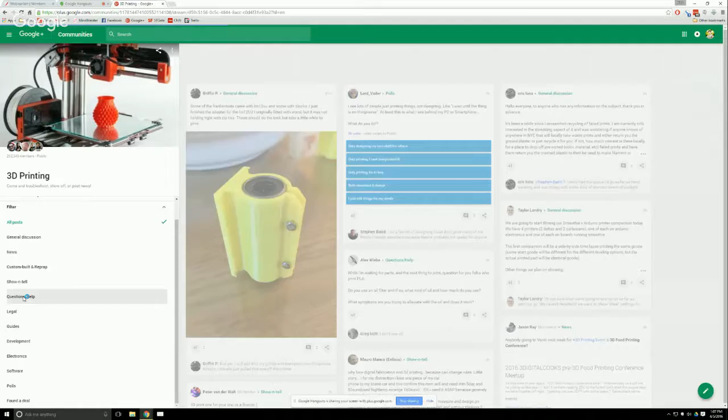There's polls and general discussion. If you look down on the left-hand side, if you're not familiar with Google Plus communities, you have all posts, general discussion, news, show and tell, and questions help. If you click on questions help, you'll go to that section, and there's a lot of people wanting to help you with various things.

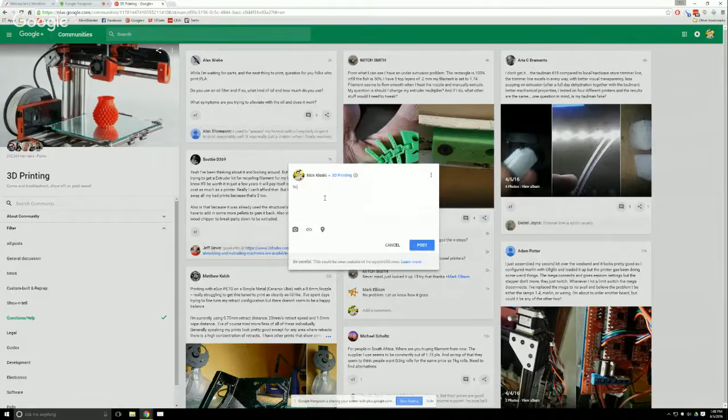For example, this guy with the little fish here says he thinks he has an under-extrusion problem. If you click on these comments down here, you see there's people helping him with his problem. So if you have a question, you can click on this little pen on the lower right, this green circle.

You can write a question like, hi, I have a question, and when you click post, it'll ask you what category you want your post to go in, so you'd say questions or show and tell, that type of thing. I'm going to discard that post. So this is a really good resource.

Again, if you just go to Google Plus and do a search up here for 3D printing, you'll see a whole bunch of things pop up, but under communities, which is the second link here, 262,000 members — there are some other 3D printing communities, but this one is the biggest. So that is by far the best way to get help that I have found.

Now there are some other ones if you're into more professional uses of 3D printing. There's the LinkedIn groups — a few communities on LinkedIn if you search for groups for 3D printing. But those are mostly for professionals asking about metal 3D printing and similar topics. You wouldn't really ask generally about your home printer there, or at least I haven't seen too many people do that, but it's a good resource.

Let me go back. We also had a person, Bill, ask a few different questions, and I'll get to those. The first question was, is there a mobile app for our new site?

So I do want to show something that we're very proud of. I will go back here and actually log out like this. We launched a new training website at honeypoint3d.com/education.

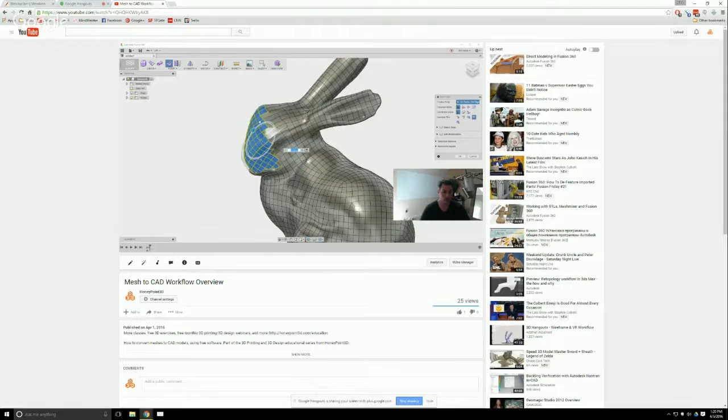This one is a mesh to CAD workflow. This shows how to go from a mesh that you start in Meshmixer, how to convert that mesh into quads, since Meshmixer is all triangles, into quads, and then how to bring those quads into Fusion 360 to make that an actual CAD model, something you can move and edit, and you can see this is a full parametric CAD model. So we have a video on that, and I know a lot of people are very interested in that.

And then also this one, which is image to 3D model. This started off with, I get this download every week from Creative Market where they give you some free things every week, so this was a pack of leaf shapes. I show how to take a picture, just a photograph, bring it into Inkscape, which is an open source alternative to Adobe Illustrator, and how to use the tools inside of Inkscape to create a vector image. So you can see that black and white image there, it was just a couple clicks, not very hard to create that vector image.

And then we bring that vector image into Fusion 360, and I clean it up a little bit, and then it turns into a profile that you can then extrude and turn into earrings or something like that. So it doesn't take actually that long to turn a photograph into a 3D model that you can 3D print.

I'm going to go over that a little bit today, but I do want to make sure to answer the question about best practices for cleaning up 123D Catch scans.

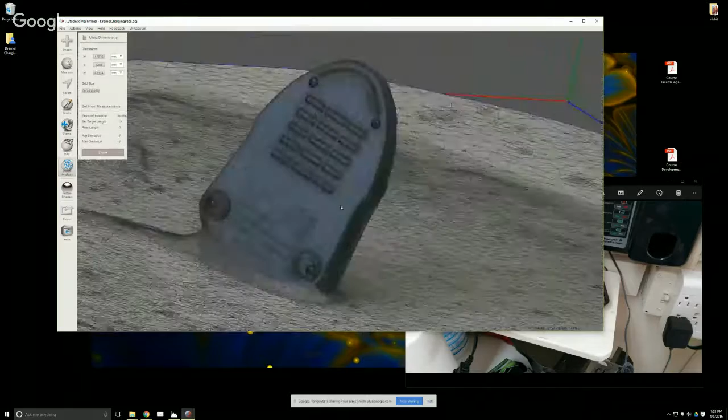But one issue with this that we had in previous versions of MeshMixer is this came in, let's look and see units. Right now this is 47,000 millimeters, so kind of too big for a Dremel charger.

And there was no good way to kind of change this. Well, now there is. So I'm going to actually do this to inches because I did this. It doesn't even matter if I keep or convert it. I could convert it - 1,800 inches. But if we look down here, it says selected measure left drag, so you see set target length.

If you look in here, you can now actually click on something and hold down the control key on your PC or command key on your Mac, and you are dragging this line. And I did a measurement. I'm going to let go of that and say set target length right here as 3.5 inches. So I said that this is 3.5 inches right here.

And if we look in - actually this is kind of a, this should say - I think it's kind of converting into millimeters and inches improperly. So let's try that again.

So from here to here is 3.5. I'm actually doing some weird conversions right here. It worked earlier when I tried this because I did it properly. But, so let's kind of do this in another way.

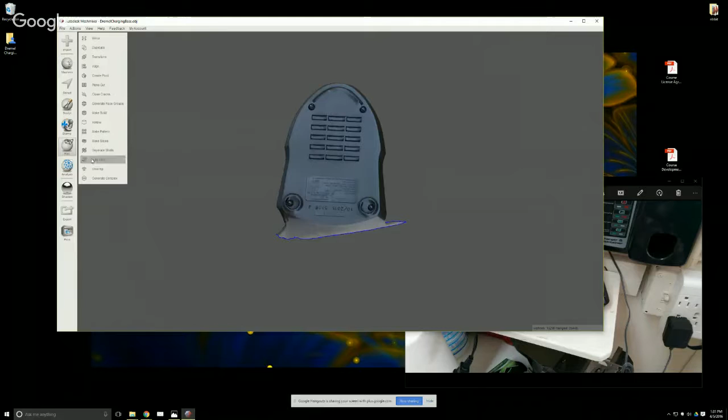So still non-manifold, but I can fix that by going to Edit, to Plane Cut, and you sometimes have to exit out and say I kind of want to plan the cut right around this bottom right here. So I'm going to go to Plane Cut, going to drag right around the bottom here. I'm going to look underneath to kind of see what it looks like when I'm done. Okay, I'm going to say accept.

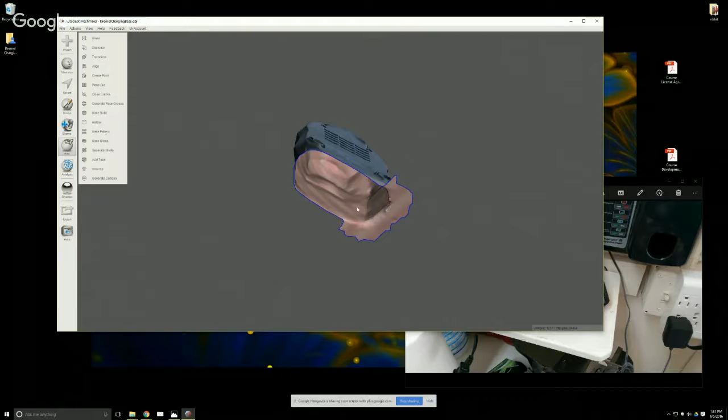And you see also that it's remaining hollow right here when you click accept because I didn't cut all the way through, so MeshMixer is not going to create a boundary right there because that wouldn't work. If I go to Plane Cut again and make a cut right here, you can see that now the green is filled in because I'm just missing this little edge here, and I can click say accept. So that's pretty good. I've cut off a little bit of the roundedness of the bottom, but it's good enough for what I'm doing right now to show you all.

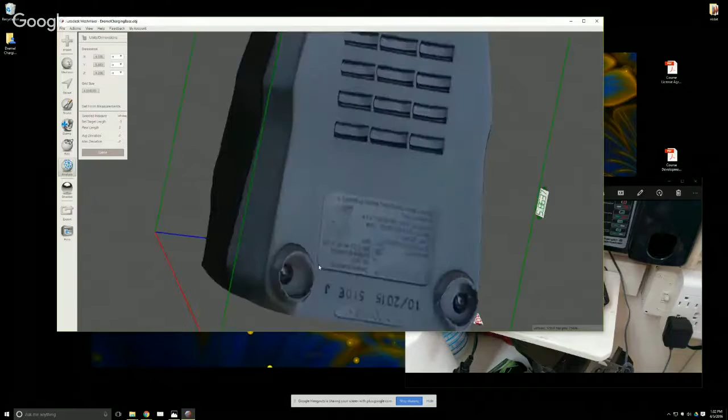So let's try to actually go into units and dimensions right now and see if I can left drag on this and try to set it. Yeah, so this actually looks as if it is properly sized right now.

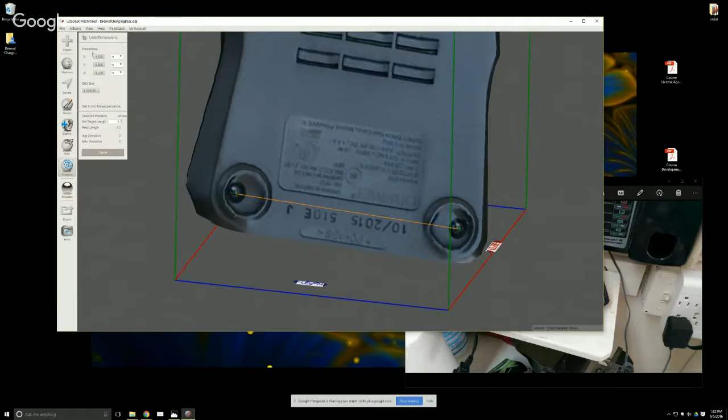Oh okay, no, actually I figured out what was going wrong. So this up here, the dimensions, we're showing the overall dimensions of the entire scan, right? I don't know really what I was thinking. It was showing a high number of things because it went out here, but it actually changed to the proper size.

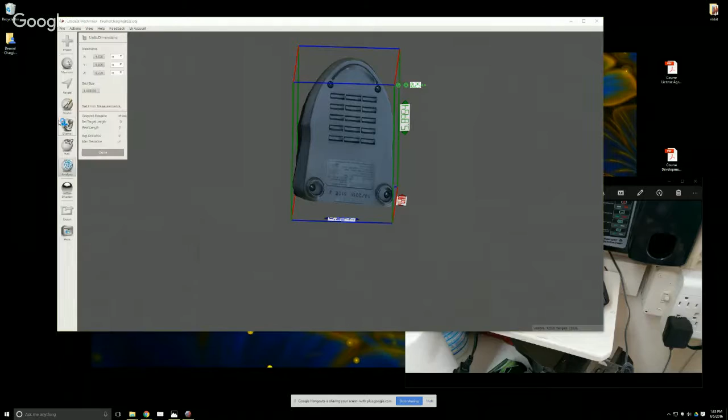So now, because this is actually important enough to actually show you again, since this is brand new with MeshMixer 3.0, let me import this just to show you.

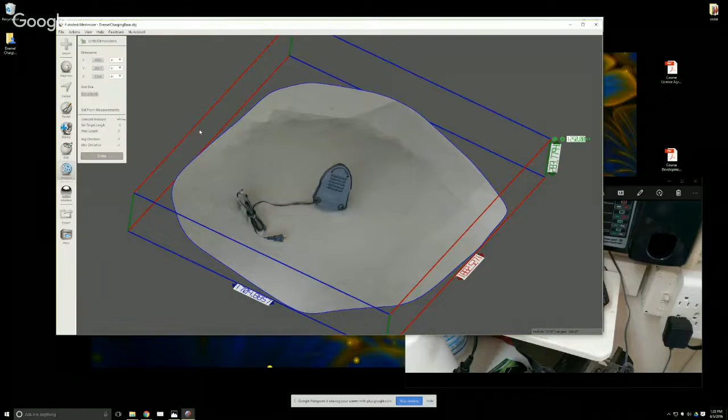Yeah, so that was the mistake I made. I went into analysis to units and changed this to inches. I could even convert it - 1882 inches, that really doesn't do it. So what I want to do, which I didn't show you before, is hold down Control on PC or Command on Mac, then click and drag and set this to be 3.5 inches. That's actually fine.

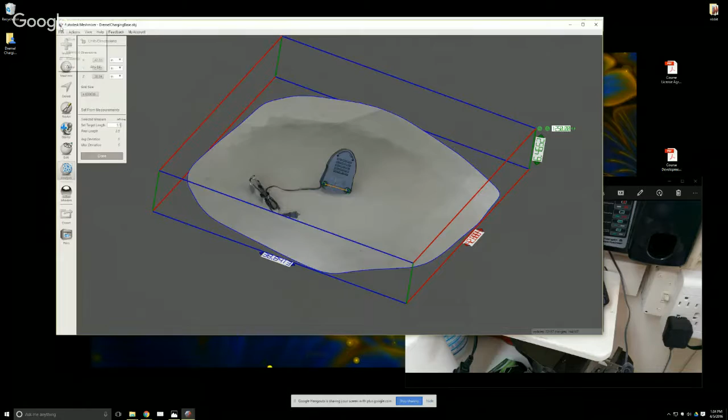It's now resized. These XYZ dimensions are for the entire scene, all of this floor space. But I just set it based on this here. So that's kind of what I forgot about before. So this is now properly sized.

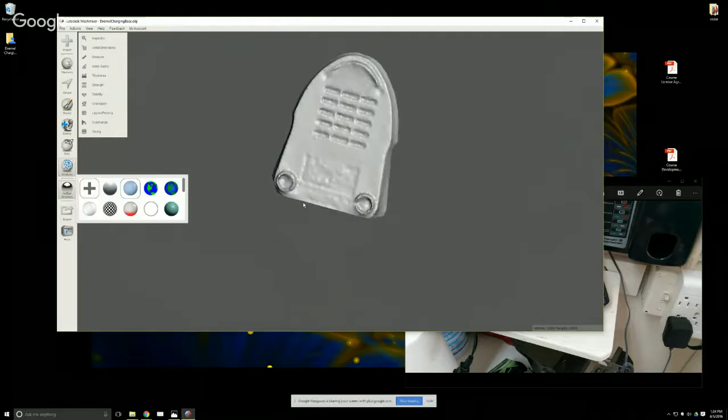For making a bracket, the easy way is I can press W. I have a good amount of geometry here, so this will actually work. Press W again. I'm going to go to shaders and just drag this shader in to get rid of the texture because we don't need that right now.

So the very easy way of doing this is to click on select, make my brush a little bit smaller, and I'm just going to paint my bracket. I know that this side is going to be facing outwards because that's where the battery goes. So maybe I'll make it kind of a cute little bracket to hold it in the front.

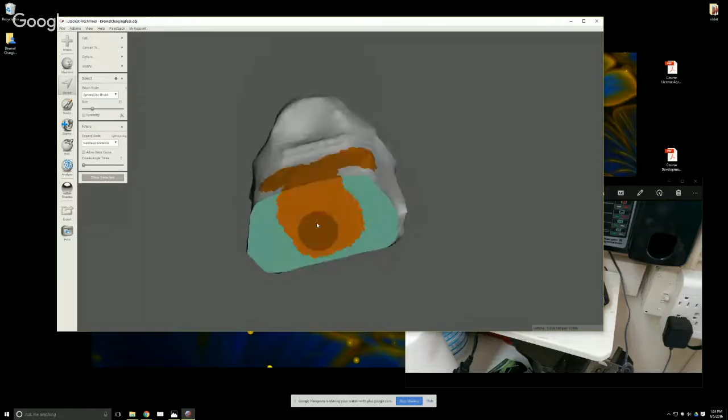I'm going to paint on where it goes in the back. I don't want it to block all of these vents in the back, so I can have it come up, and if I wanted to, I could have it come out a little bit like this. So it looks kind of nice.

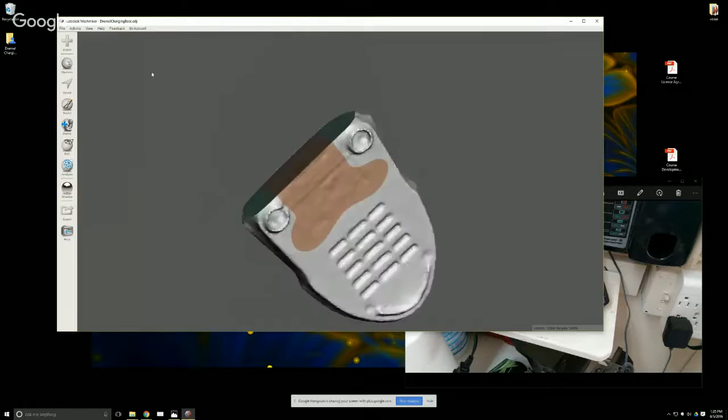And then remember, if we want to make the edges nice, we can press B for smooth boundary and say accept. Now if we say clear selection, we will see that we have a face group set - this is just a region on here that we can manipulate. If we click on select again and double click on this face group, it selects it.

And we can go here to Y to separate. So what that did is it created a separate object. We have two objects down here - one is the base and one is the selection. I'm going to open this up a little bit, turn off the eye on the base because we don't really need the base right now.

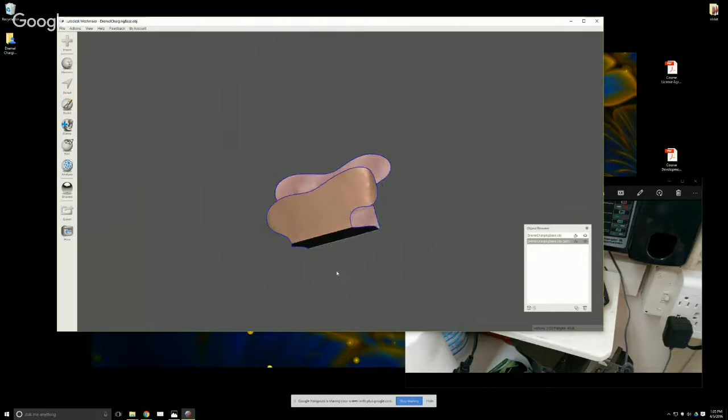And here is our mount. It will kind of turn the corner right here. I don't know if I really want that, so I can go in and kind of edit this down a little bit.

Delete that. And again, I can double click on this blue line and press B to smooth the boundary again if I wanted to, and press different deletes to do whatever I need to do. But we have this, and we can actually just say select Control A, or Command A, to select the entire thing, and then go to extrude.

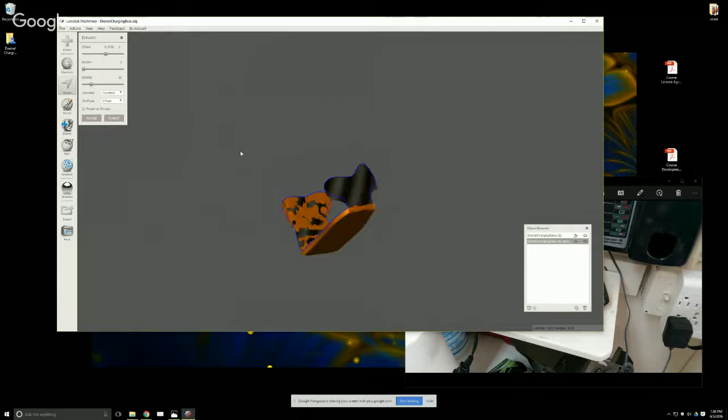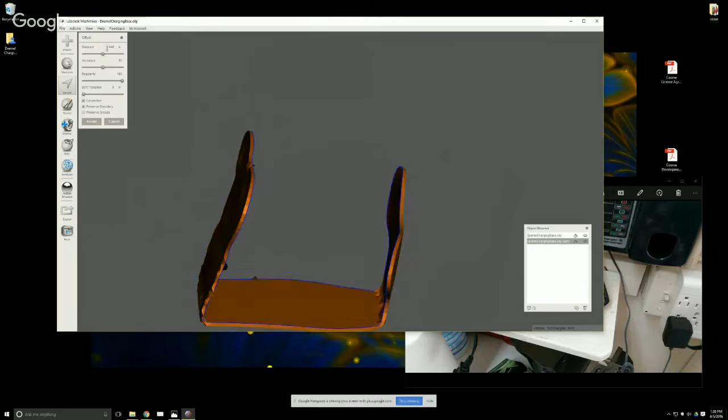Or actually, we can say constant or off of the normals - we would maybe want to do it to normals. Extrude sometimes works or sometimes gives you some crunchiness, or you can also go to offset. And offset kind of creates two planes unless you click connected, then offset connected. You could see that offsetting in a negative way goes inwards, and we don't want that because now we're going into the model.

So actually I do want to do a negative. So negative, let's say - oh, I'm in inches right now - 0.1 inches. And it kind of goes out like that. And you click accept.

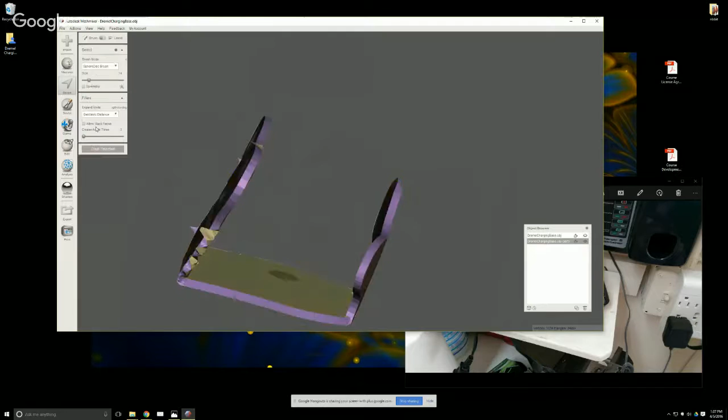Now we have some crunchiness here, some issues with the mesh, and you can do other things to clean this up, like do the edit to make solid. That'll a lot of times go out and smooth things, make this accurate. Let's see how it does here. Yeah, a little bit more accurate. You can say accept.

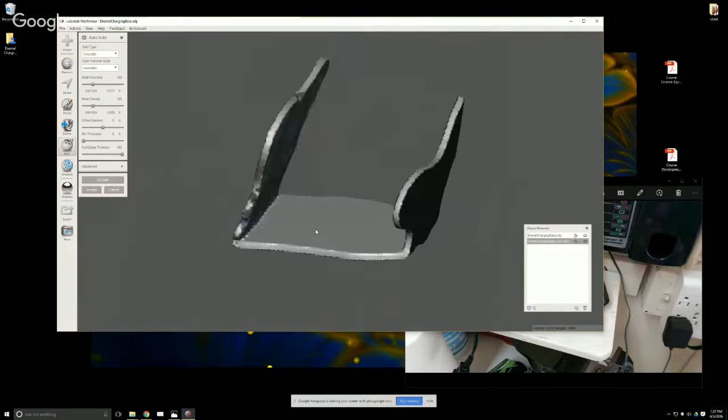So at least everything is manifold now. If you have some areas that you want to do some smoothing in, you can select those, go to deform to smooth, and smooth them out. But generally we have right now a base, and we can cut holes through these or do things like mesh mix in a cylinder.

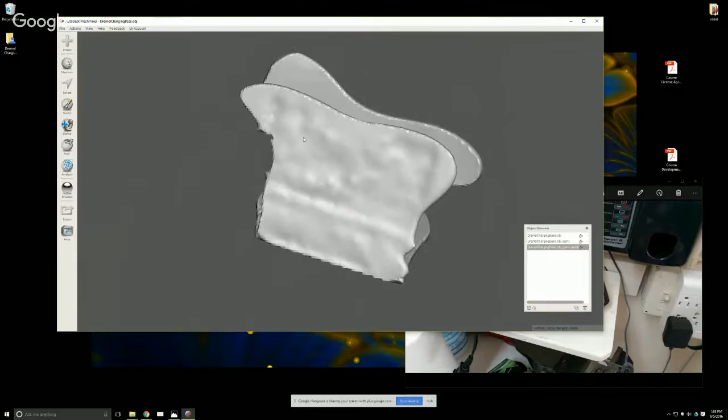And if the cylinder is of a specific size for your holes and for your screws, you can do that, and then kind of Boolean them out - so this and this, Boolean difference. So screw holes that go in. So that is one way to do it.

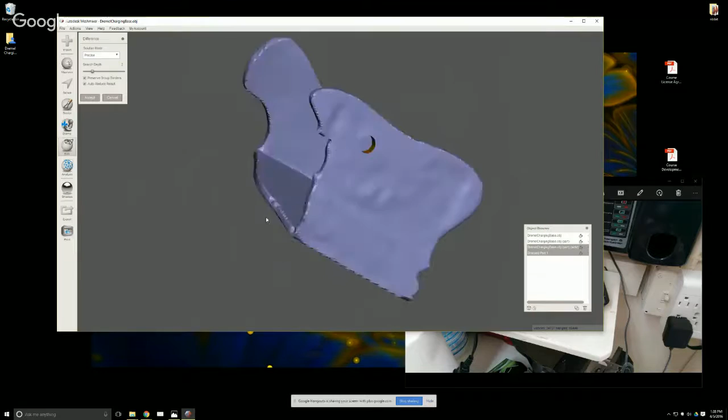If anybody has any questions, I would be happy to show you that. But that is one way of creating a mesh bracket using Meshmixer. This is pretty much guaranteed to fit, and you would just screw one part into your wall, and assuming this was strong enough to hold it, you could support that charger on there.

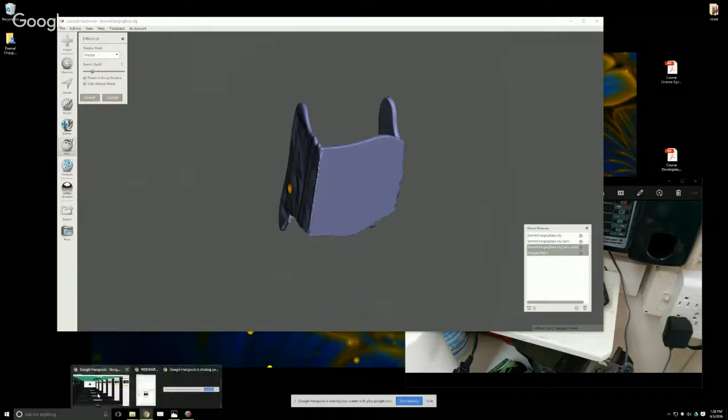The other way to do this is, let me go back here and show you for a second. This is the method I show in the video, and it's really powerful. As I said, I'm going to create a Fusion 360 class, but what I go over in the video online is a really powerful technique, and pretty much no piece of software does what I'm going to show you except for Fusion 360.

This is a reverse engineering workflow where if you start with a scan, you can create things that you could put into production worldwide with a CAD program. Let me start up Fusion 360 in the background. This is actually not that hard to do. It requires three different pieces of software: Meshmixer, something called Instant Meshes, and Fusion.

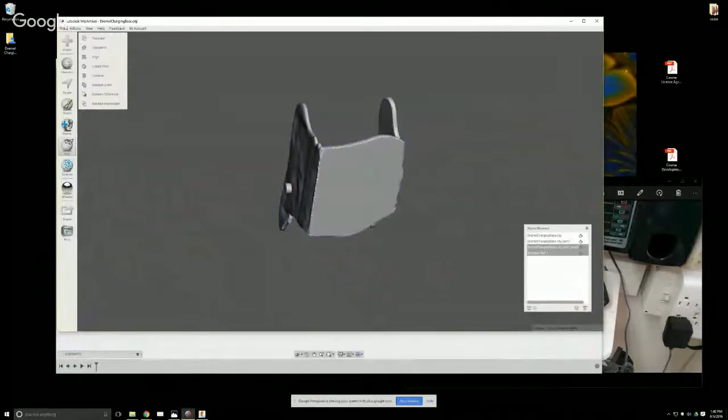So I will show you what that looks like pretty quickly. Let me go back here. Cancel that, and I'm going to just go back and replace. I'm going to bring in the charging base again, and go through this a little bit more quickly. So I'm going to plane cut, you know, kind of what I think the base should be, like this.

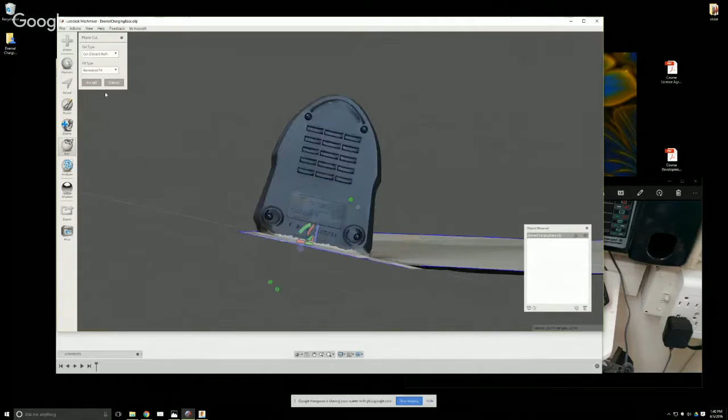Plane cut it a little bit more like that. Say accept. And you see this quite a lot - this is not connected to this. So I can just select a little bit on here and say modify, expand to connected, and then delete. And this is a base.

So the trick here is to export this as base, but in OBJ format. So I'm going to say base OBJ. There we go, it is exported.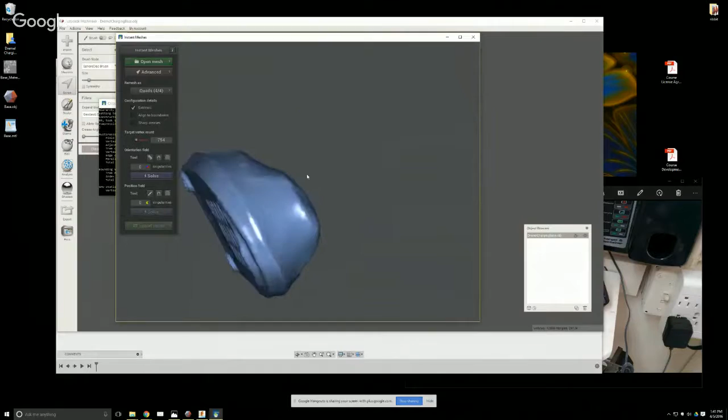And I'm going to start up a program that I also linked to in that video called Instant Meshes. We say open mesh - it's actually pretty simple. Bring in the OBJ, you can see it right here. I want quads, total vertex count - let's make it a little bit more complex, somewhere around 2,000.

You just say yes, click solve, click solve, click export mesh. I'm going to say pure quad mesh and extract. There we go, there's the mesh, and then save. I'm going to say base in quads.obj. The reason we do this is because Fusion wants quads, right?

So here we are in Fusion, and you can go over this in the replay. I'll go over it a little bit quickly, but hopefully not to lose you. Here's the workflow for Fusion: we say create base feature. So now when we go to insert, we can say insert mesh - otherwise you don't get insert mesh, this is only in base feature. So we're going to say base in quads.

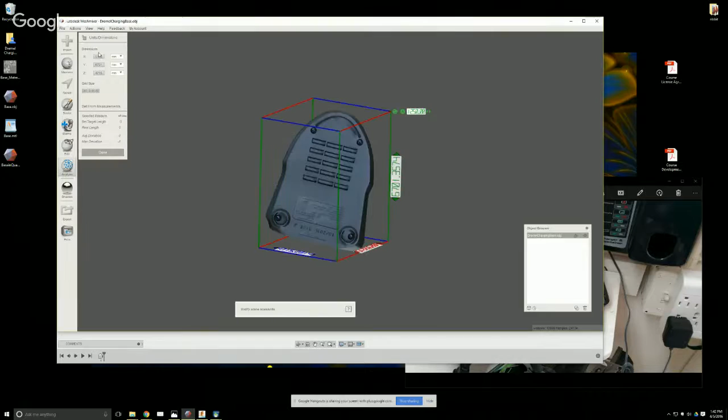And unit type was - this one was in millimeter. Actually, I need to go back because I didn't size this correctly. So I need to go back in here and say units dimensions, switch it all to inches, units dimensions, and now I'm going to do this control click from here to here, was 3.5, and say done. Now units dimensions in inches - I'm going to go back to millimeters and convert it, just because things work better inside of millimeters.

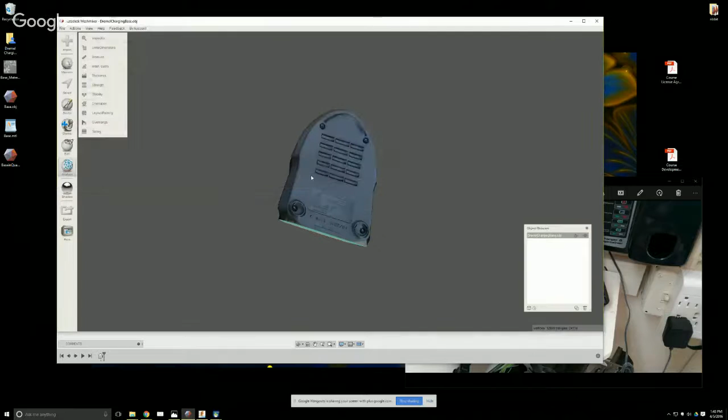And then export this again, export as a base, replace, and then go back into Instant Meshes and do this again. So let me just go do this quickly - open mesh, base, quads, 2,000, yes, solve, solve, export, save.

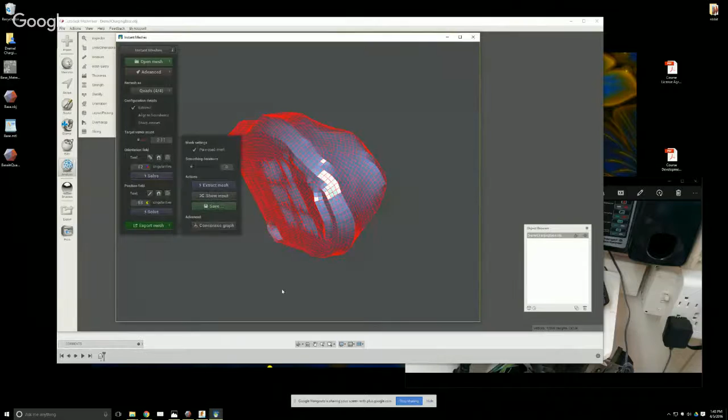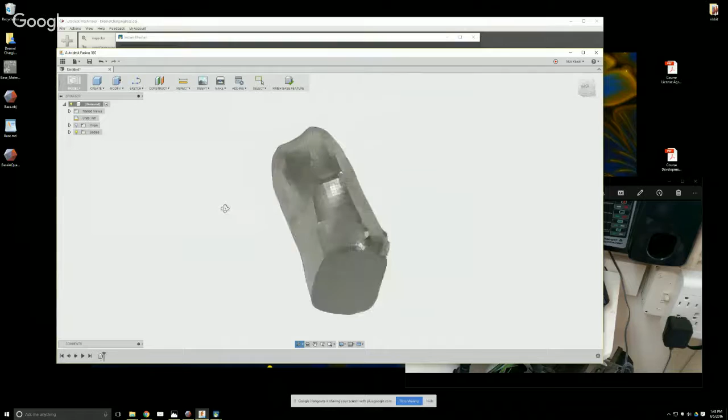Okay, so now it'll work because it wasn't in the correct thing before. So anyway, we went to create base feature, now insert mesh, base in quads - you can see right here, modeled in millimeters. Click accept, and here is your object in here. So great, now we need to say finish base feature.

So we're back in parametric modeling, but this is not an actual parametric model yet. Now here's the kind of trick that is hidden - you need to turn off design history down here in the lower right. Do not capture design history.

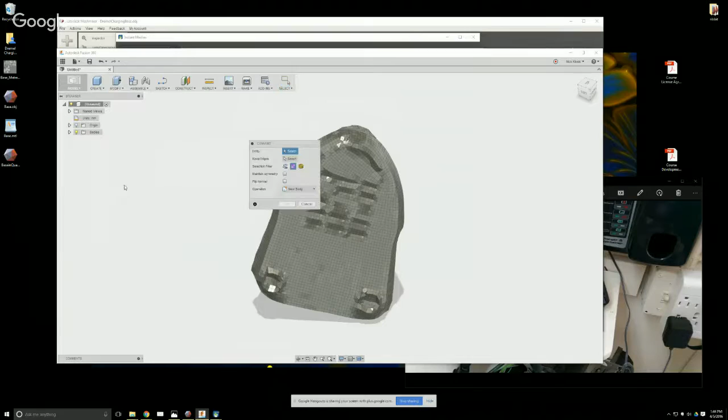So you're now in direct modeling. There's an option that says convert, so we're going to say convert. What entity? I'm going to go over here and click on mesh body. The entity is right here, base in quads, and say okay. This will take, depending on your computer, a few seconds to a few minutes to do.

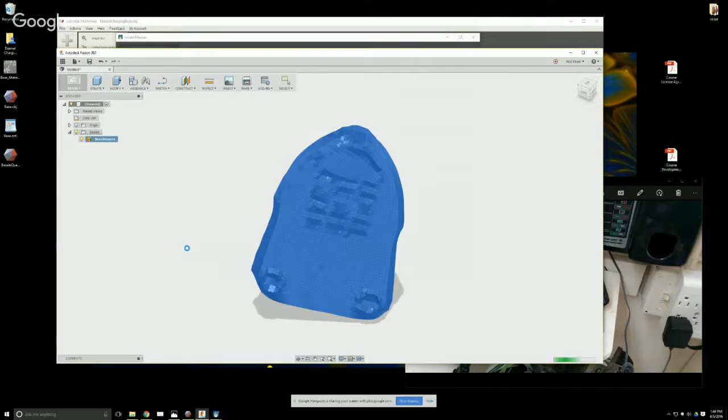For my computer, it's pretty fast. So what it does is now gives you a parametric model. We still have our base right here, but I could even just delete this because I don't need that anymore. And now you can see that this is a parametric model. It's nice and all different types of quads.

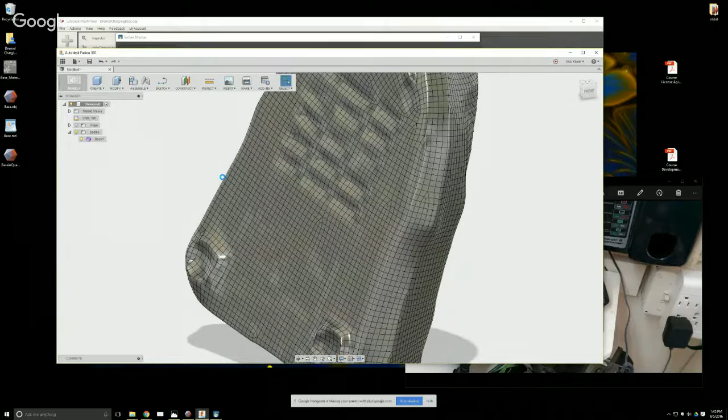I can go back to unsaved right here and say capture design history, and then Fusion will think about it. It will turn all of these squares into regions, which are just kind of visual representations. And now they're regions. But we can still do things like edit the form, and edit this however we want.

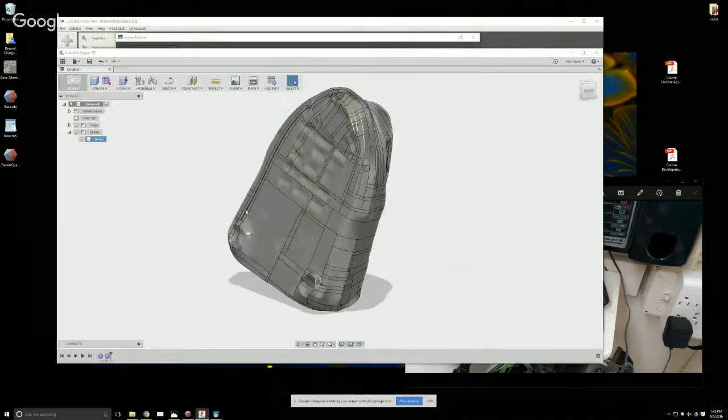So we can push and pull it. We can do all sorts of things with these different shapes inside of this as if they are a sculptable body. It's actually a very cool workflow. So now this is editable. We can go in and change this if we want, just like any other mesh body out there—physical materials, properties. It is a full piece of editable geometry.

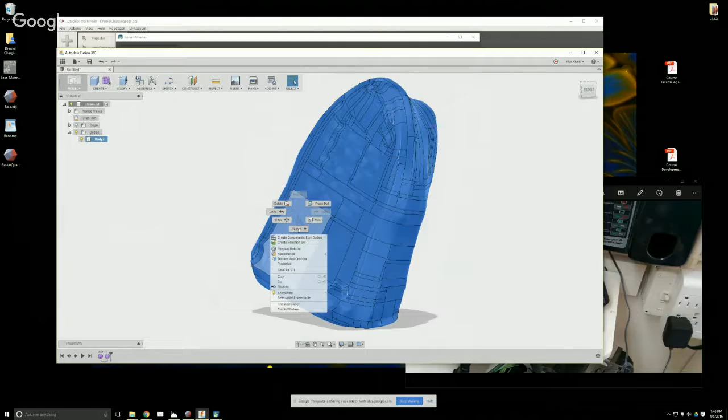So you can see in here, different things, and then you can go in and edit the parametricness of this later. You can say down here, edit form—oops, this was the second form that I created by mistake. Edit this form, and now we can go in and select one of these and say edit form, and push and pull it.

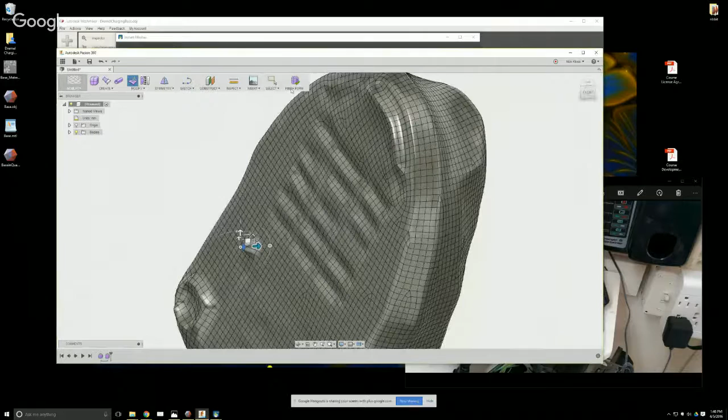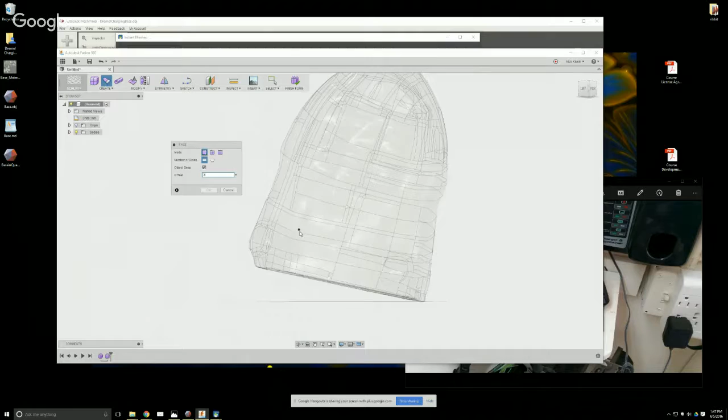As we want. But the actual workflow for this is: undo that and delete this guy so it's not concerning us. We can actually go in and create, under sculpt, and say create a face. Mode is simple, and we're just going to say object snap right here. We can even create an offset. I'm going to create an offset of 3 millimeters, so now this little dot is 3 millimeters off of this base.

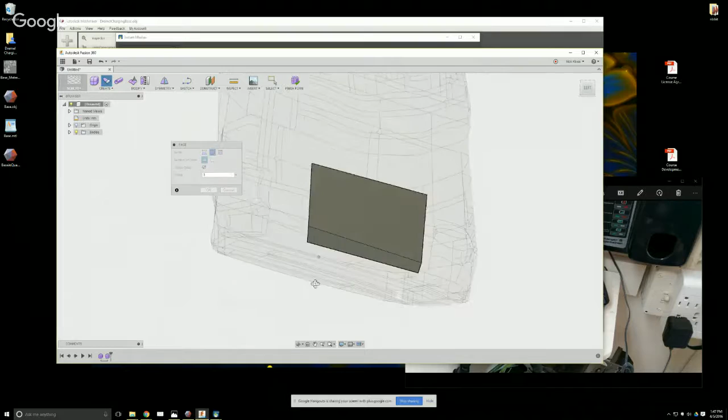So I can go in and click, click, click, click, and I've created a face that is 3 millimeters off from this body. I'm going to go into edge mode right here, again 3 millimeters. Click on this edge and kind of turn the corner right here like this. Now we're starting to turn the corner. I'm going to click on this edge again and go here—oops, properly, snap. There and there. Edge. There.

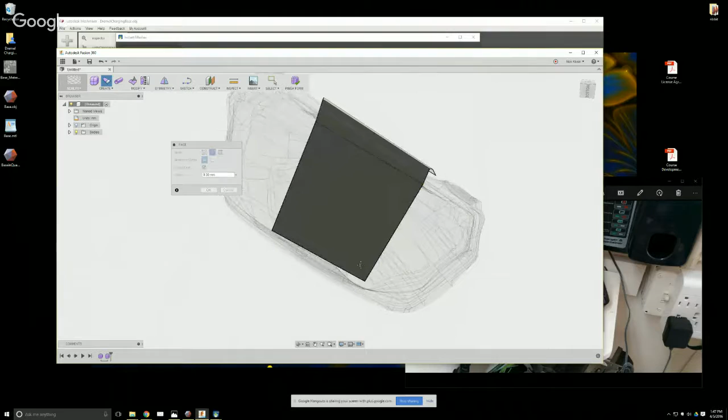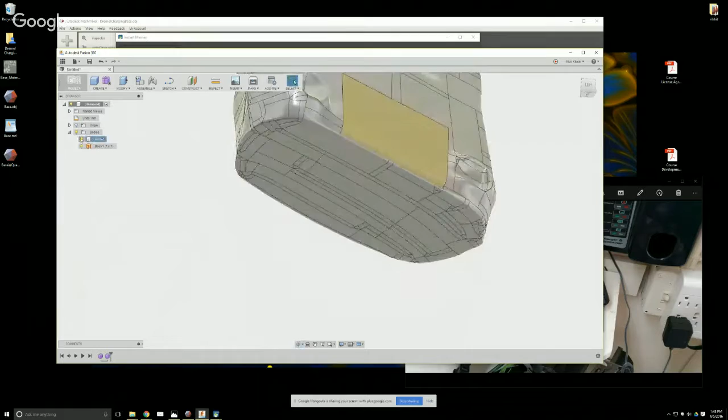And there, and then I'll just do this a couple more times, then I'll show you what we have. This edge, there and there, and up there and up there. I mean, this was just very rough. But now when we say finish form and we turn off this body, we have a full parametric face that we can use to then thicken if we want.

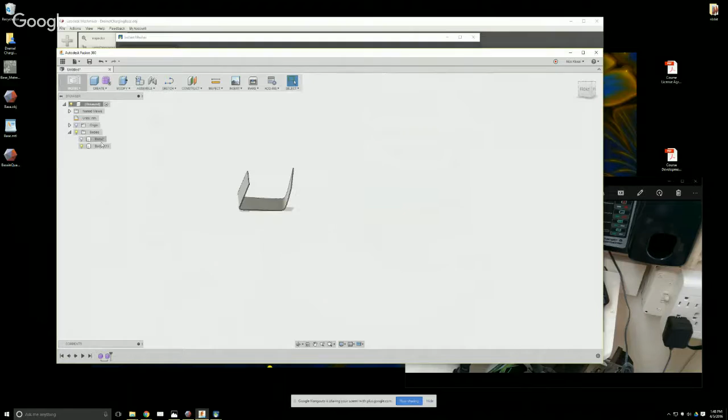We can say, actually go back into this—oops, modify, thicken this body by 1 millimeter, and finish form, right? So now this is a solid body right here that we could 3D print. We could do all sorts of different things to it. It is a full CAD model. And if we go back to the body here, you can see that it pretty much fits. We can tweak this a little bit to work, but that's kind of the workflow for that.

Go back here. So let's see if anybody had any questions while I was doing that. So Bill had a question about this: will Fusion include the tri to quad conversion in the future?

It does do that now. It's a different type of step. So let me say don't save. Oh, actually, you can't see this, let me—okay, so it can kind of do that now, but it's a lot harder, a lot more constraints.

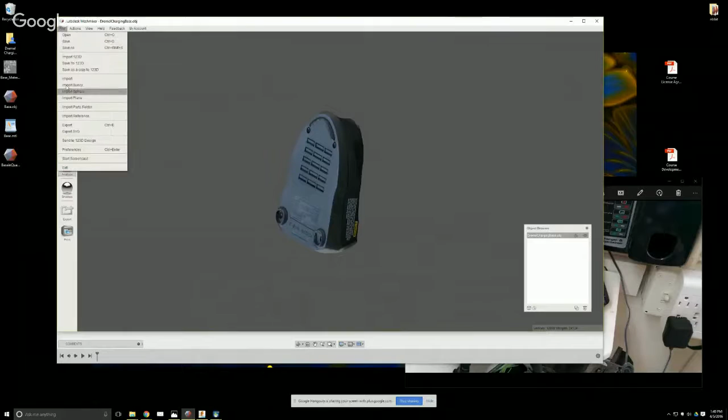So let's say import bunny. This is the default Mesh Mixer bunny, not manifold. So let me go to inspector and repair it. If you look down here, maybe you can see it, maybe not, but there's 13,000 triangles in this. Mesh Mixer—sorry, Fusion—will convert, but only at 10,000 faces or less.

So you would need to go in and go into select, Control A, and then do reduce right here. So edit to reduce, and you would say triangle budget. Say, that's what it looks like at 1,000—that's not really bunny-like. Let's make it 6,000. Yeah, a little bit better, and say accept.

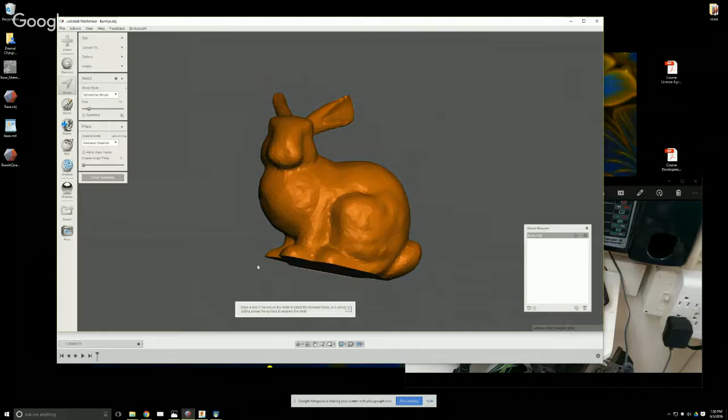So now we say file, export, bunny 6,000 tris, to desktop.

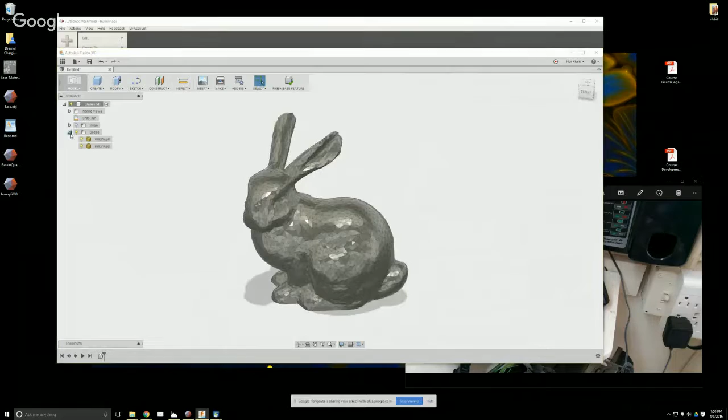We can go back into Fusion. So now in Fusion, you can say create base feature, insert mesh, bunny 6,000 tris in millimeters, and your bunny comes in, but it's in triangles. So you can go in, there's two different groups here, but you can right click and say mesh to brep.

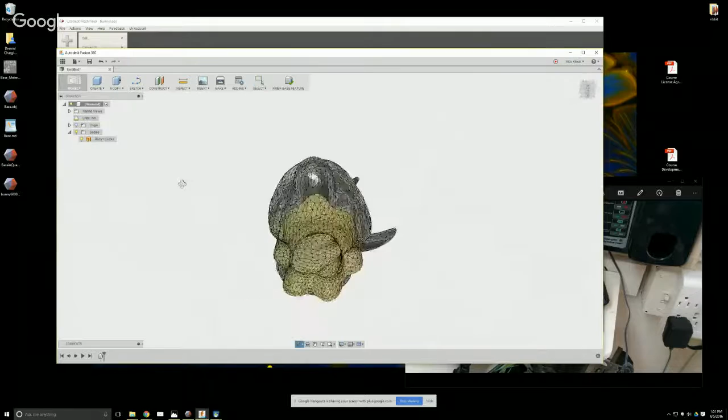This actually takes a lot longer because it's turning all of these into breps. And now we can even delete both of the original bunnies. So now, I guess I didn't make this manifold to start off with, but now this is a brep. That would be difficult to do, but you can bring this in and finish base feature, do different object snapping.

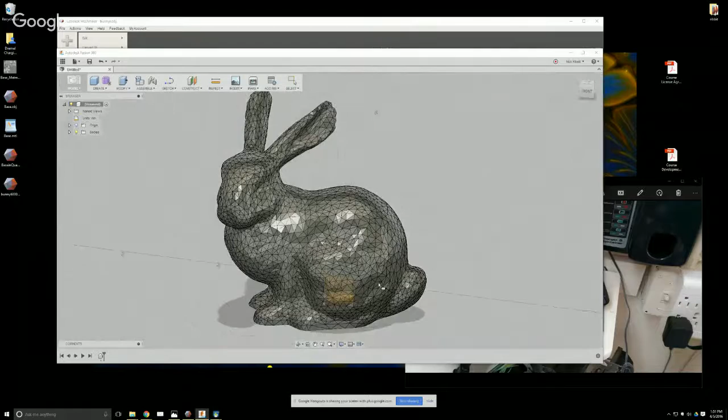If you created an object like this, and then moved it down inside - well, actually this isn't going to work because the bunny isn't manifold, but you would be able to do some cutting techniques with this, Booleans and all of that.

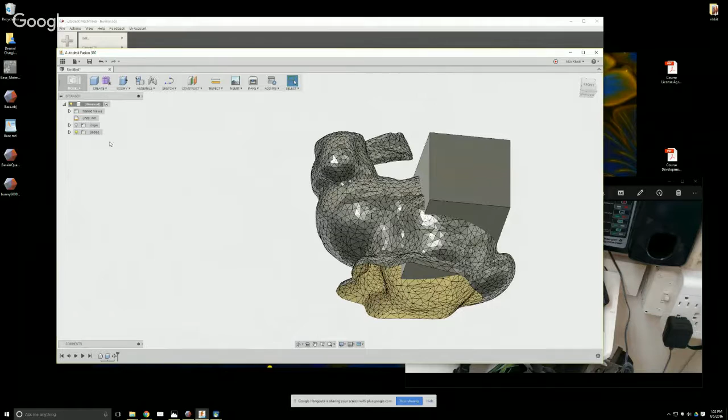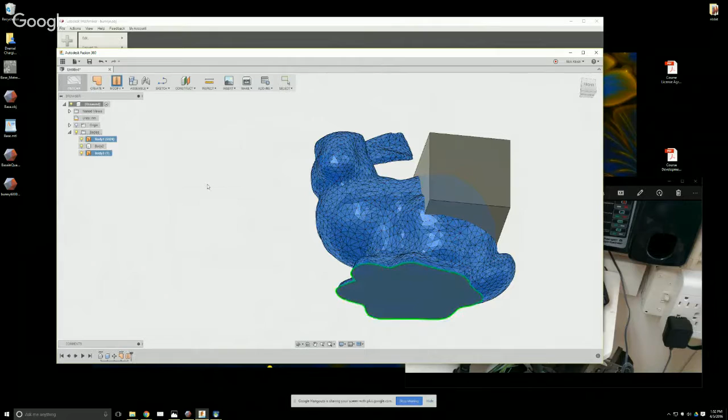And now you can do different Booleans. So in the model workspace, you can do a combine and say target body is the bunny, tool body is the square, and we want to cut. So you can do that, but this bunny isn't really editable.

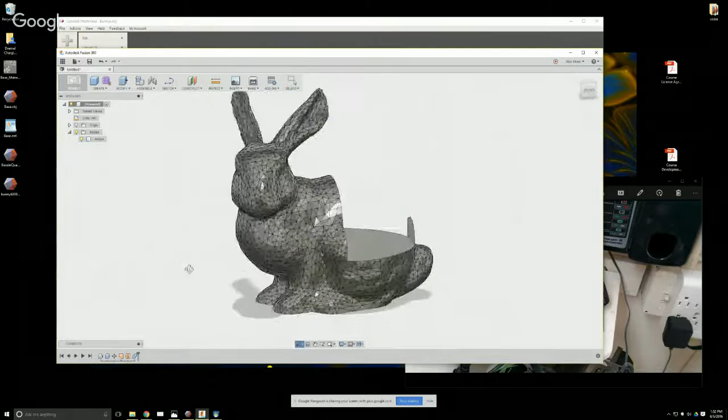You can do things with individual faces in here, you know, you can press and pull them. Even my computer kind of bogs down at that. It can't be repaired, you might have to go into direct modeling, things like that. So the conversion - let's see, it press pulled it, kind of no idea what it did right there.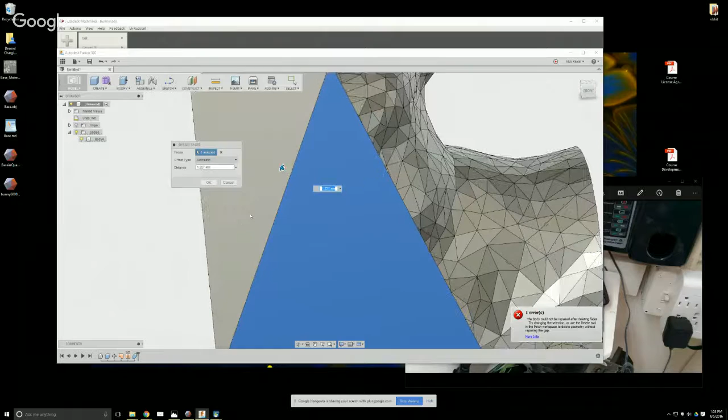But you can do a bit with this, but it's nicer also to sometimes turn it into quads using that instant meshes tool. So I'll go back.

Fusion, the Fusion team that I talked to, I know are working on a mesh workspace for Fusion. So all of the mesh, much of the Mesh Mixer things are going to be coming into Fusion. Probably not the 3D printing things about creating support structures, but probably the other things about manipulating the mesh. Again, I don't know when that's going to happen.

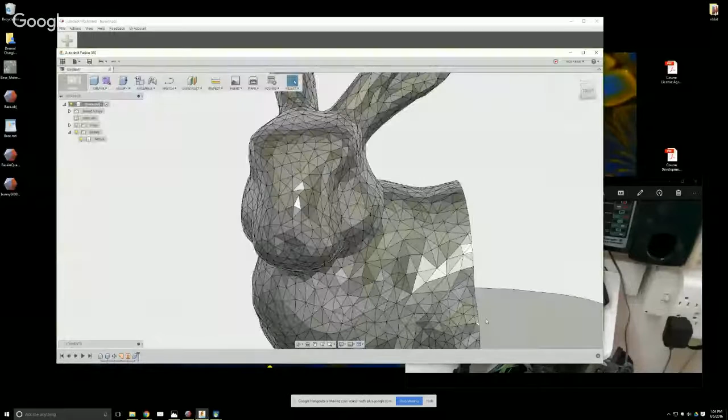Hopefully that answered one of the survey questions about a little bit of one of the workflows for modeling. I want to again say that if you are doing modeling for 3D printing specifically, one of your best friends here is to go into analysis, into overhangs.

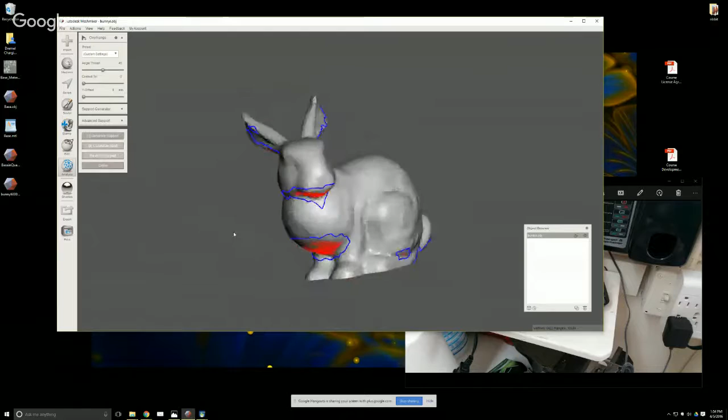So for 3D printing, if you're printing at home, these would create overhangs. You see these are the support structures that Meshmixer creates, but this angle setting right here is what you would want to play with. So you would go to Analysis to Overhangs and turn this up. You see where the red is growing - everywhere there is red, it says that, based on where the bunny is, would require supports. And if you click Done, it goes away.

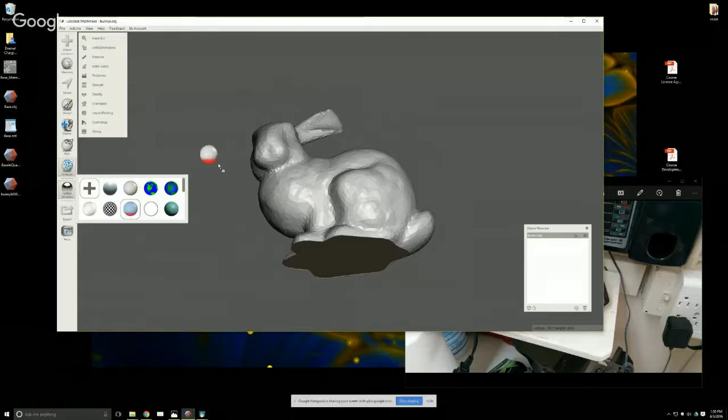But this shader right here, if you click on this shader with the little red bottom and drag it onto your bunny, you get the red back. And if you do something like transform and move the bunny, you're actually seeing where new support structures would be created.

One of the benefits to this is, we see we need some support structures under the ears right there. We can go in with this shader active and click on Sculpt and maybe Sculpt and Draw. Make my brush a little bit bigger and strength a little bit less, and I can start kind of sculpting some more in here. As you see me put volume underneath the ear, you can see the need for support structures.

I'm going a little bit closer - you can see the need for support structures start to go away, or just barely appear. We would need to create a lot of volume to have the ears not need anything, but we can do that. I'll do a little bit stronger - we can go in and start kind of sculpting this down.

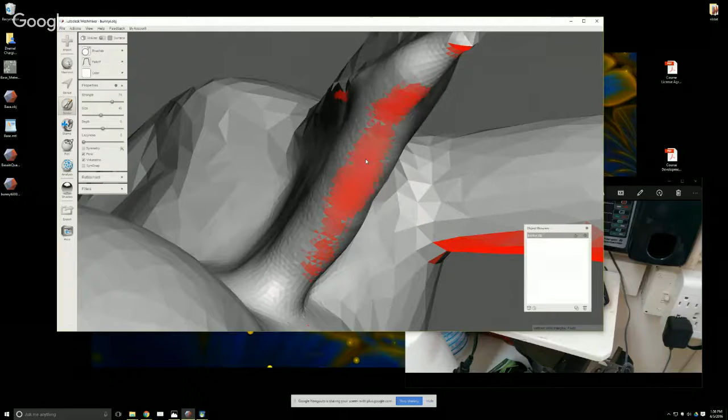You can see it's kind of dynamically updating where the support structures are needed. But as I create more volume underneath here, the need is going away. And because these are very marginally going in and out of existence, it means it's only very marginally needing support structures.

It doesn't look much like a bunny anymore, but you can use this really, really effectively. Like this chin right here, you can do a little bit of sculpting, maybe to make it a little bit less of a curve down, and then it doesn't violate, it doesn't need support structures as much.

Something like this, even though the angle is there, a 3D printer would probably be able to print that without support structures. Something like the ear, no way—it would need supports. But something like this is gradual enough that the cooling of your material would probably be able to take care of that just fine.

So that's a really useful thing to analyze. You can make some very subtle changes to your model to mitigate needing as much support structure. Like right here, you just go boom, and you don't need as much. You still might need a little bit underneath this, but you're mitigating it a good amount. That's a really good tip I use sometimes if I don't really care about the shape of my model.

So we're just right at the top of the hour.

We get a question from Chad: why can't I paint on my texture? Paint only shows up on my white shader. That is easily shown—it's actually easier shown than talked about.

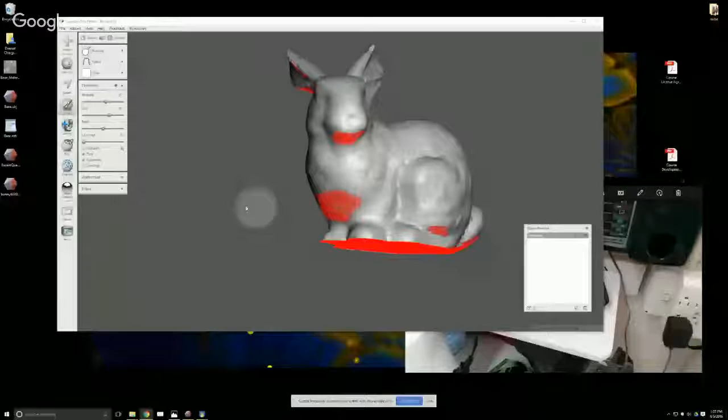So very true. Let's go on to the white shader right here. We go into Paint Vertex, and we drag around here. This can be a little finicky sometimes, but right, so we click on this. Great, okay, I'm going to click and paint, and nothing happens.

You have to hold down the space key. And you have two different view modes. This is kind of the Meshmixer view mode, and this right here is the Paint Vertex color mode. So you click on this, and then suddenly the red is here, right, and different colors.

You can go on here under surface painting. There's also something that says Smooth Color, which helps you smooth out the color transitions to make them a bit nicer. But that is only viewable in this view mode.

You can go here, or you can go up to File, to Preferences, and the Mesh Color mode. Group color is the default, but Vertex Color lets you see all the vertexes. So there are two different ways of seeing color with that.

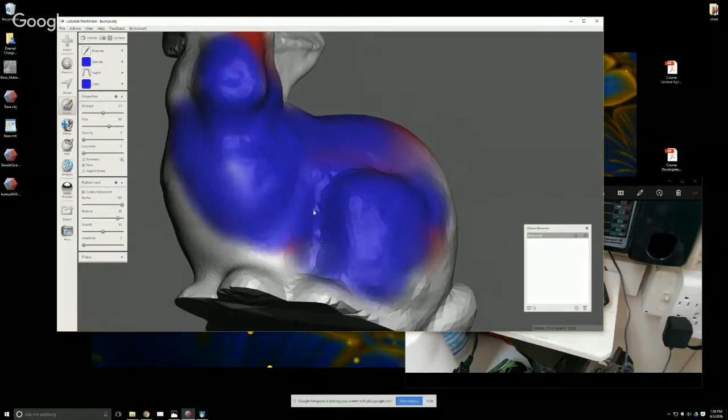And Paint Vertex is also in this. I think this is not really a bug, but also make sure that when you're painting, you don't have refinement turned on, because you could actually have refinement turned on and be changing your mesh while you're painting. I don't like that, so just make sure refinement is turned off. I think it should automatically be disabled, but they allow you to do that.

Again, Paint Vertex really works better if your mesh is very dense, so it just paints the corners. I'll go in here very quickly and remesh this. I can just do linear subdivision, make it super dense, do this a couple times. So now that's really dense.

So our painting tools are a little more effective now. You can see that these are very blocky out here and very fine right here. So painting on a dense mesh is a lot more effective.

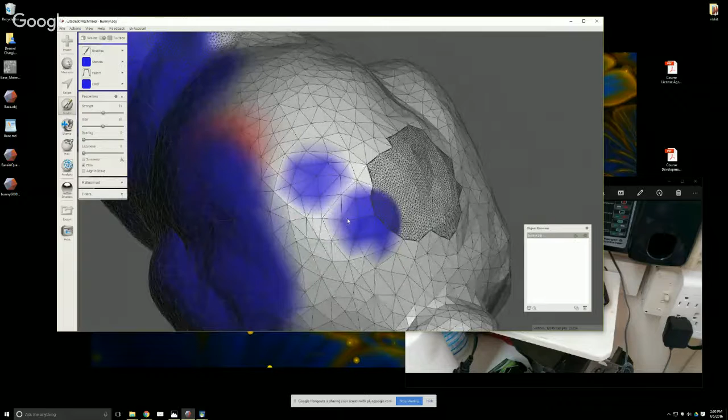And Bill said, thank you for another great session. You're very welcome. So hopefully, Chad, that helps you with your painting question.

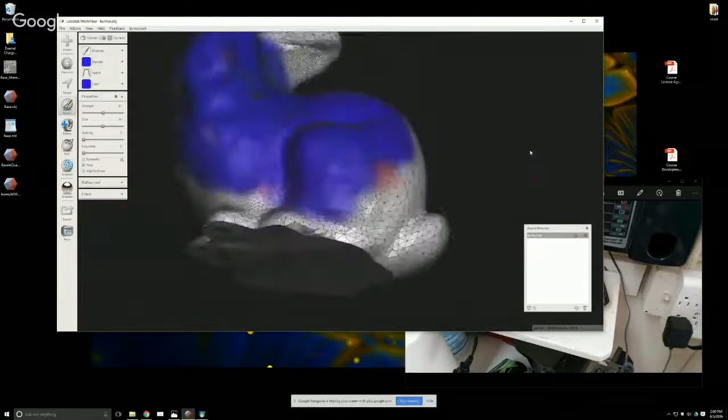It can be kind of tricky to go back and forth between these view modes if you don't know about them, but that is what it is. Sometimes it's helpful to change the background color, which is up here. You click on that, and you can make the background color a little darker, like that, to see your paint colors a little bit better. So that's another way of doing that.